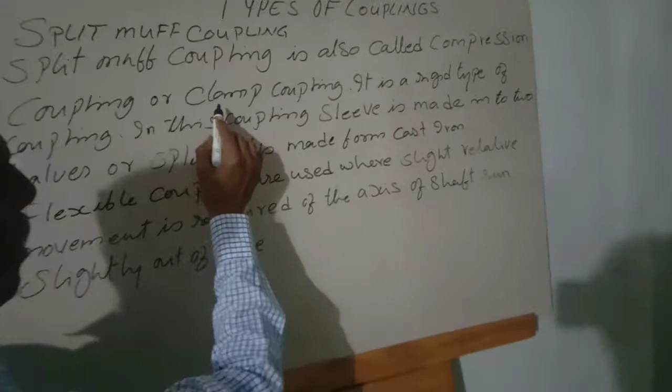Let's say in the first muff coupling or sleeve coupling. This muff coupling or sleeve coupling is made into two halves. Here, see, split muff coupling or sleeve coupling. Split muff couplings is also called compression coupling or clamp coupling. This split muff coupling is called sometimes compression coupling or clamp coupling also. It is a rigid type of coupling. See, as I say in the...

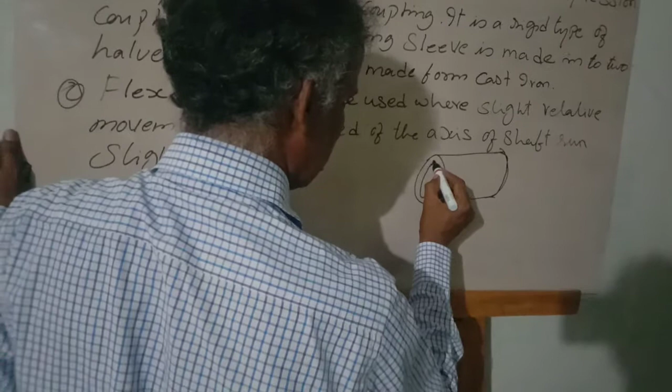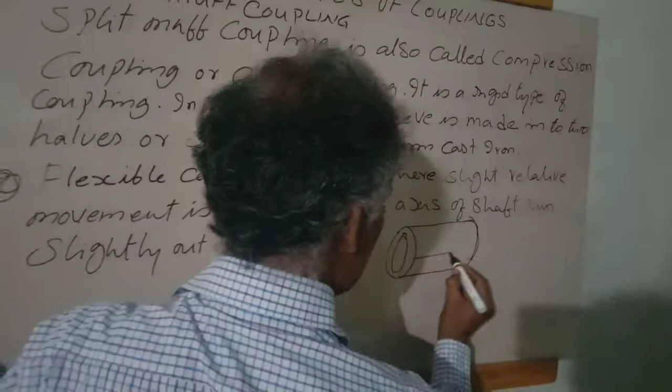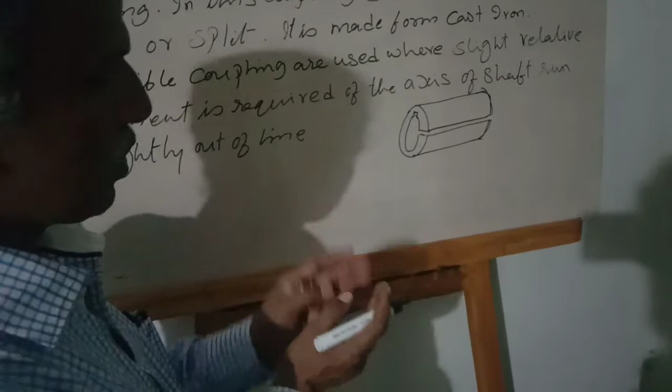This is a sleeve coupling. This sleeve coupling, sometimes they will split this one. They will cut. One side, they'll split it. So when you split this one, when you press it, it will have some flexibility, some cushioning action, like an elasticity form. Now,

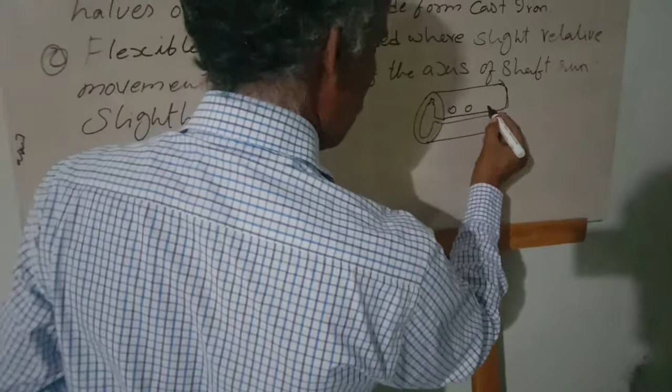Here they'll make holes to fix bolts. This is the one type of split coupling. The another one is

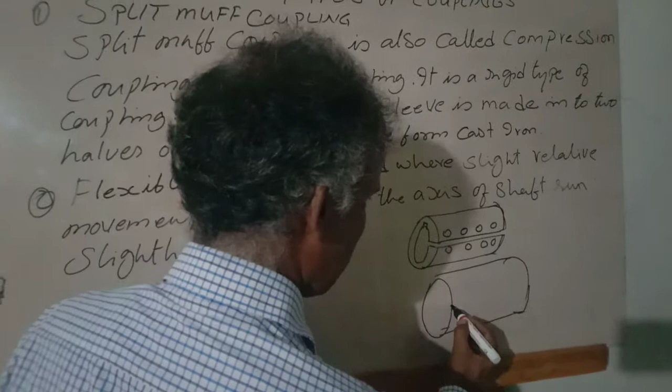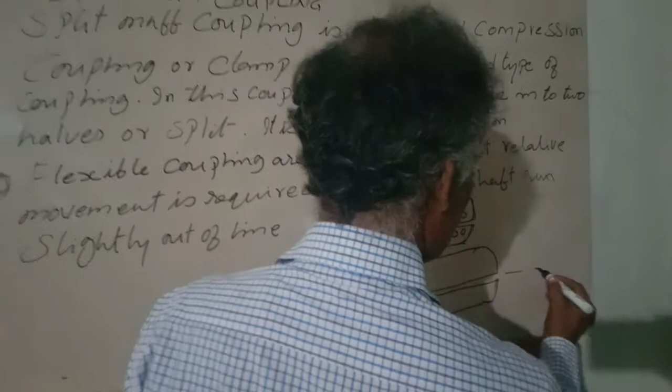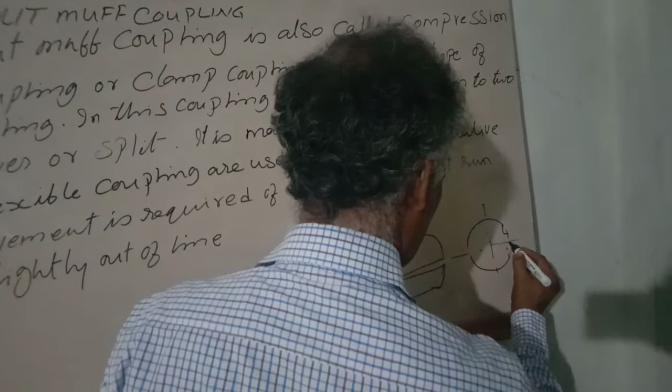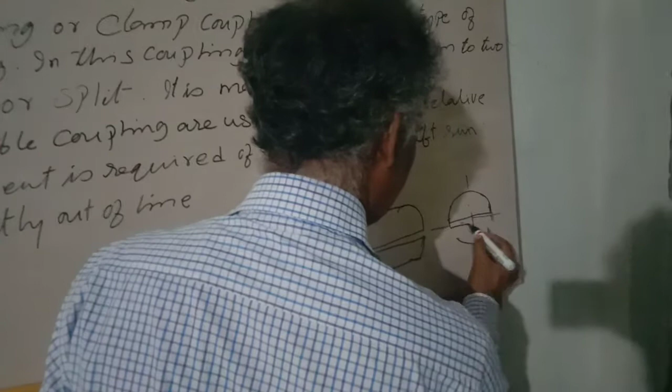Make completely two halves. They'll make into two halves. When you see from the axis of this, you can see like... or it will be same like two halves. Two halves. Two halves.

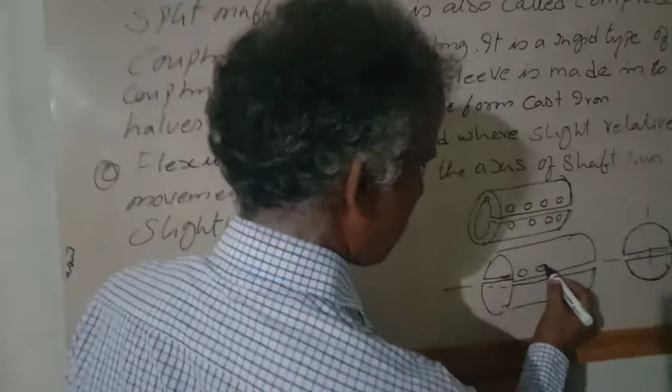Same way there will be fixed nut and bolts, either side of this sleeve, other side and this side.

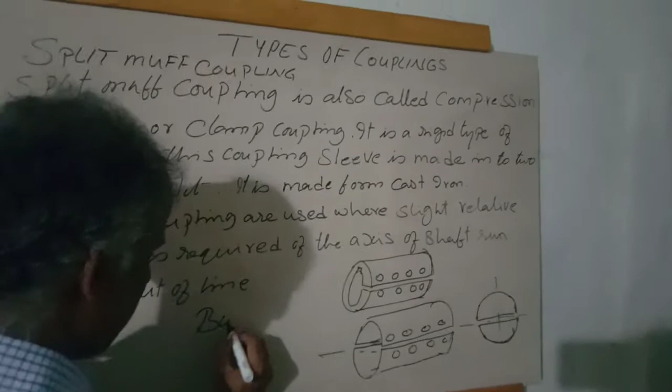Now, when they are using this split coupling, they'll make a joint of butt joint. First one, butt joint. Second one is lap joint.

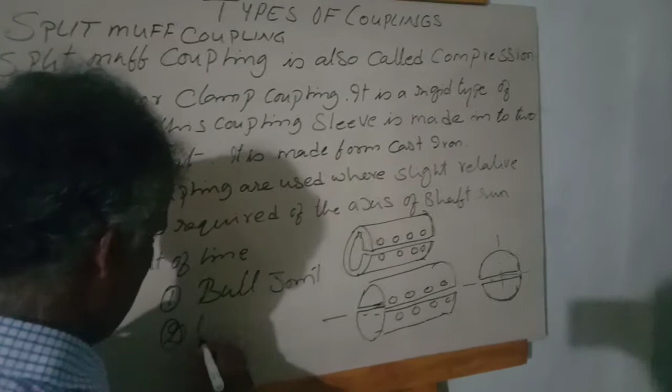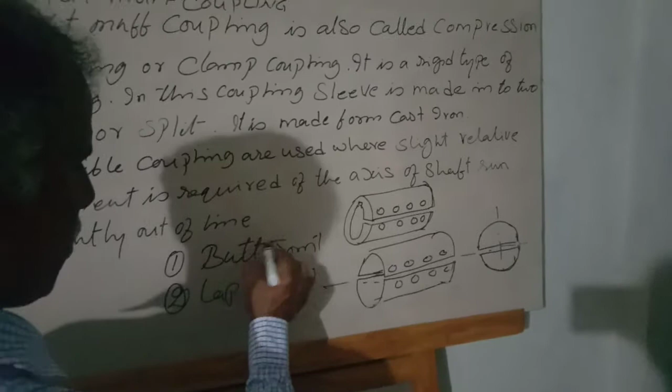When they use the butt joint, they'll insert the two shafts with the keyway in the same axis. Same line, the two keys are fixed.

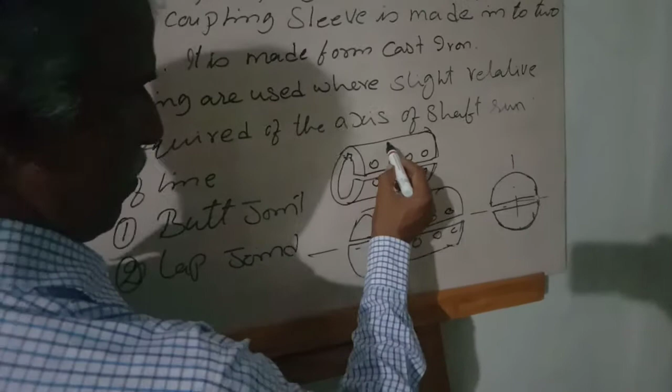If you are going to make a lap joint, at one side half of the length will be key. Another half, when these two shafts are inserted, one side here, opposite to that, other side that keyway will be fixed.

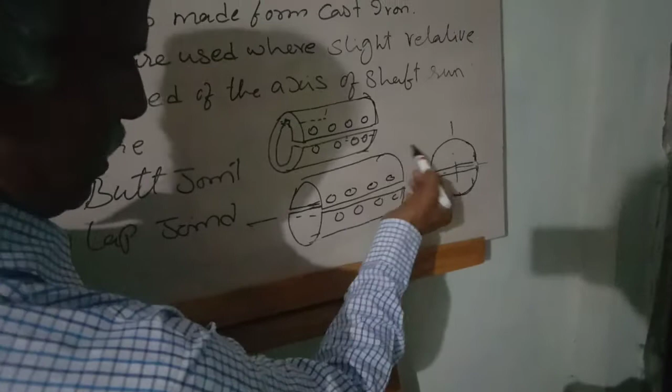This is a split compression type. That's why they call the split muff coupling is called compression coupling or clamping. With nut bolt, what are we doing? We are clamping the shaft.

This one is more rigid than the muff coupling. Muff coupling is a solid piece and with a keyway. This is with keyway and we are clamping the shaft, key, everything together. It is very rigid.

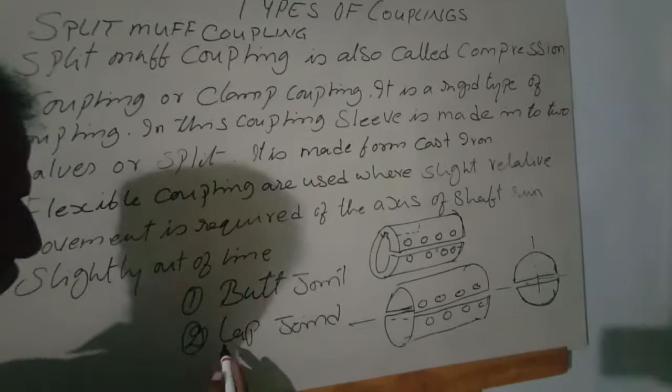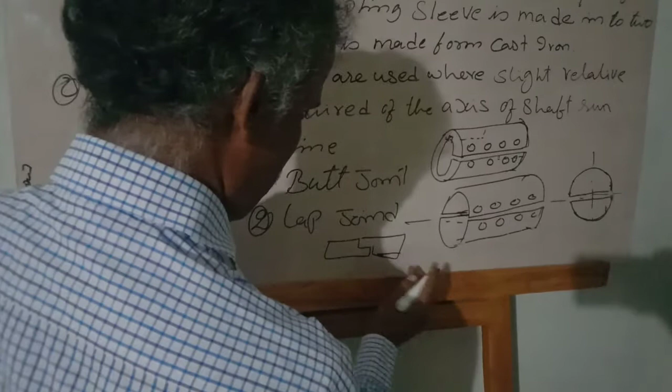It runs in the axis of the shaft. Now lap - I already told the lap. The shaft will be overlap like this.

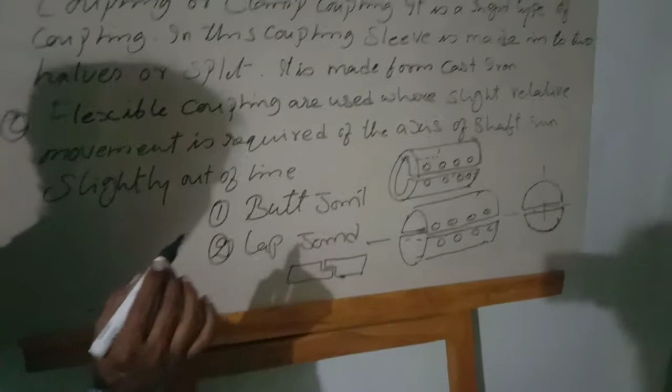In this lap joint, they have to use opposite side keyway. If it is a butt joint, the keyway will be the same. Now,

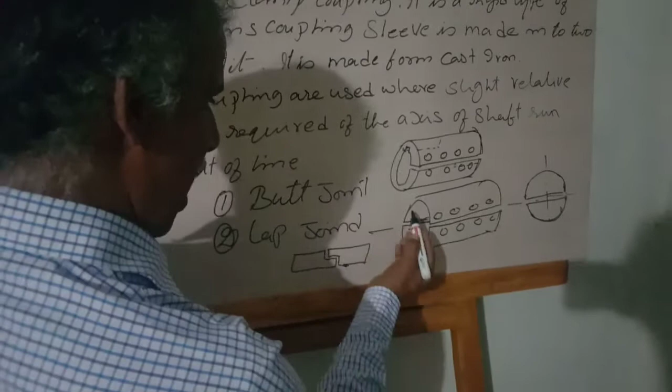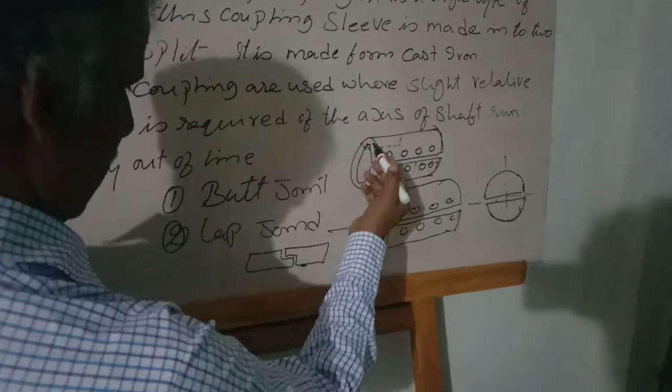In the 2-half split coupling, the butt joint also can have a keyway on the top. At the bottom also can have a keyway to hold the other shaft. Not like the split one, with the 2-half one keyway you can use here, one keyway for both butt joint and lap joint. For both lap joint and butt joint, we can use keys on opposite sides

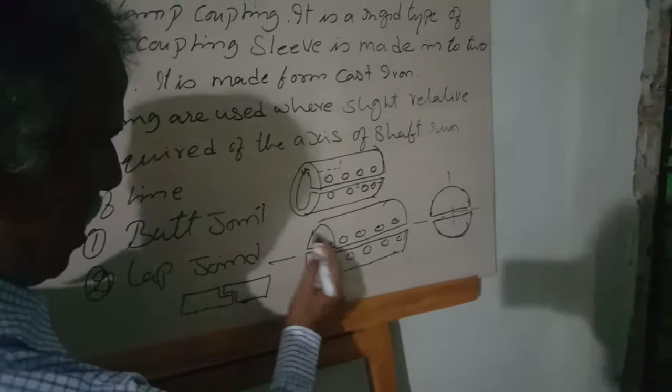And they'll clamp with nut and bolts. You have to see when you are making this, if it's a 2-half made with cast iron, it's okay. But whereas it is split at one end, it has to have little flexibility. If it is a very brittle metal, when you clamp it, it will break off.

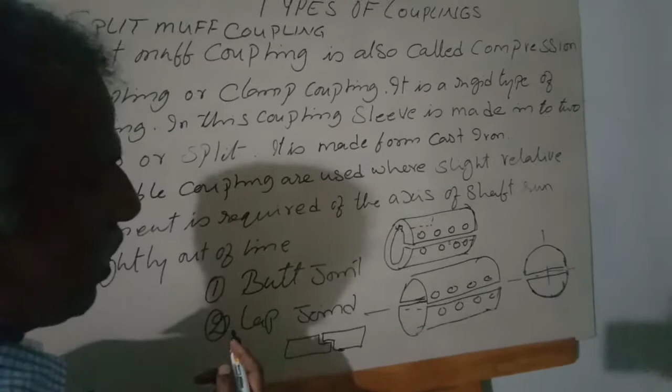So you have to keep that in mind when manufacturing it. If it is a 2-half split one, it's better making with cast iron. In cast iron also, sometimes we can make it flexible due to heat treatments, and we can use this compression type of coupling. So this split muff coupling is called compression coupling or clamp coupling.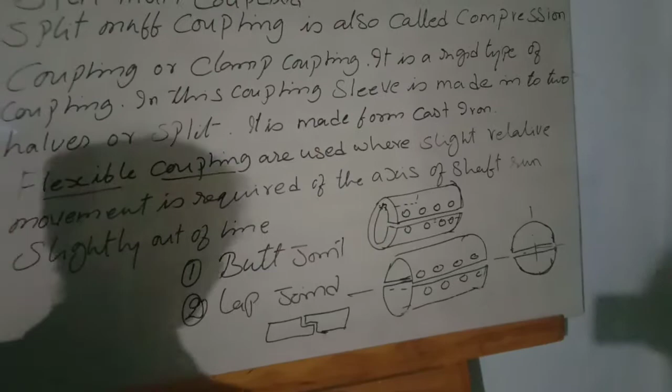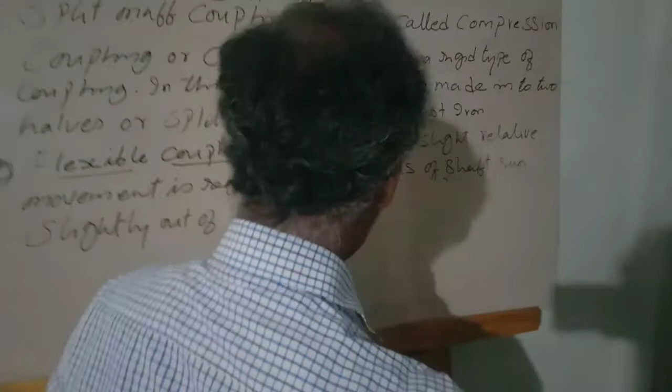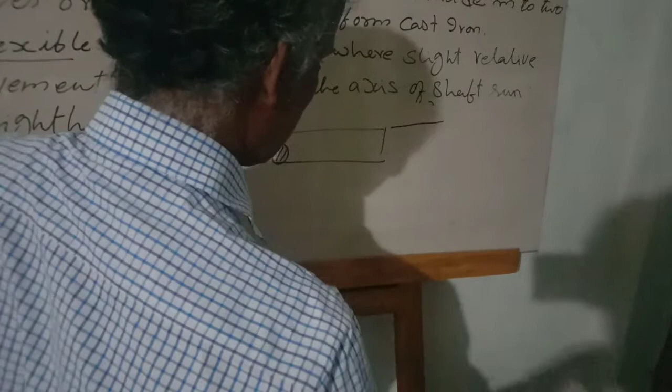Next, flexible couplings. This flexible coupling is used where slight relative movement is required. Slight relative movement is required. Example, this shaft is like this. And this shaft slightly, little bit different.

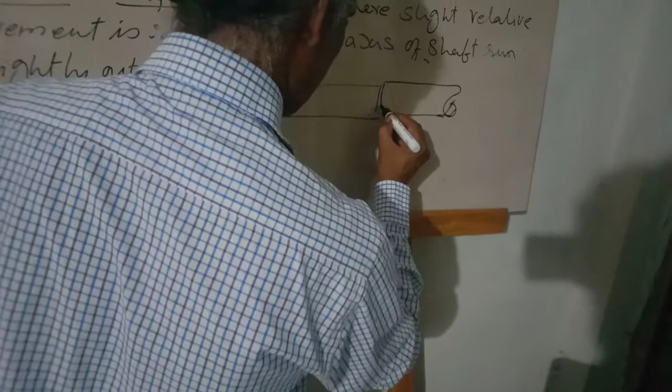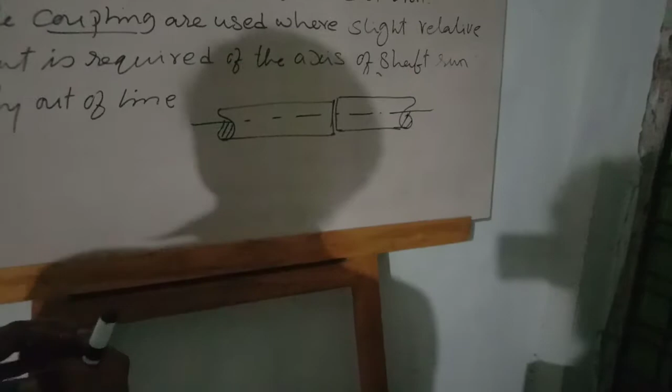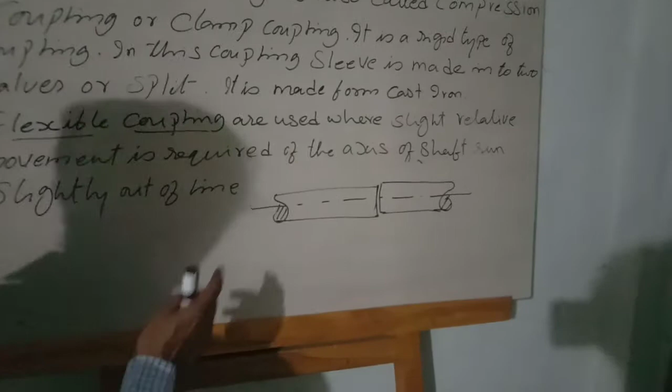Means, on the board I am showing very eccentric but very minute eccentric axis - it is not getting in line with the two shafts. The flexible couplings are used where slight relative movement is required of the axis of shaft. It runs slightly out of the line, right? So out of the line.

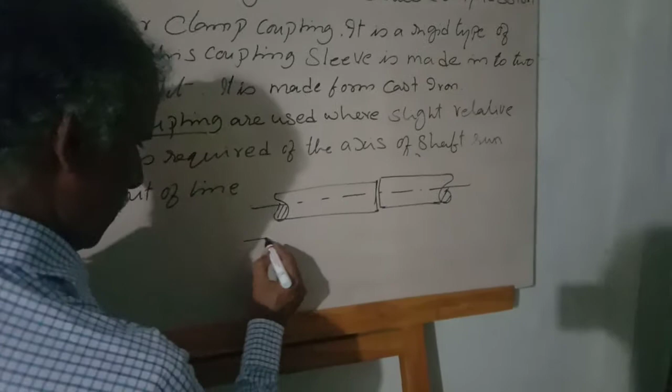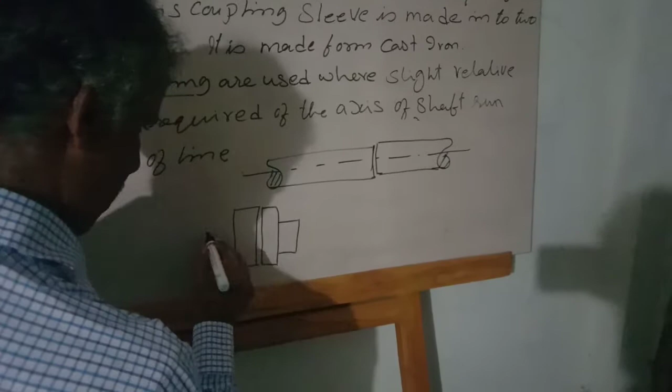For this, what they'll use? They'll use the flange coupling. Example, a flange coupling. Flange - means it's not a flange, this also will be in the shape of flange coupling. The hole. The other side nut bolt.

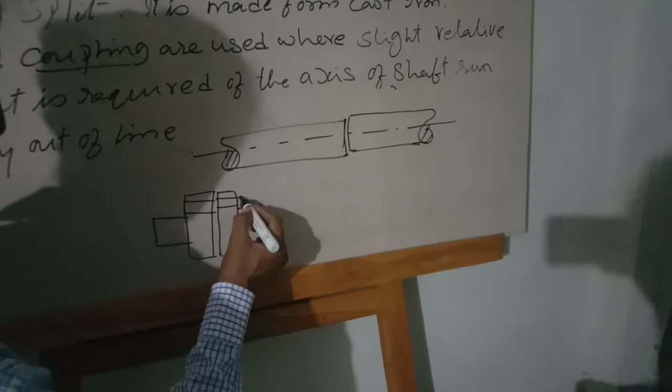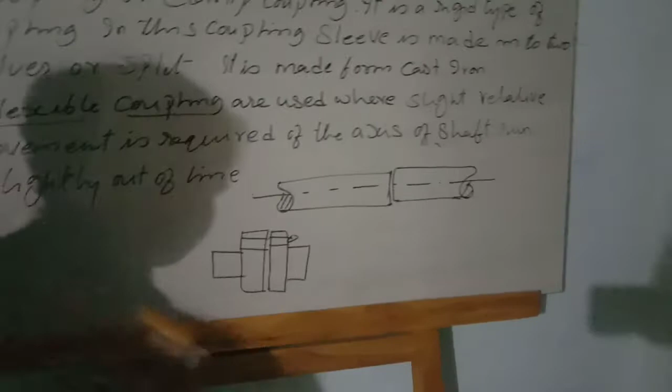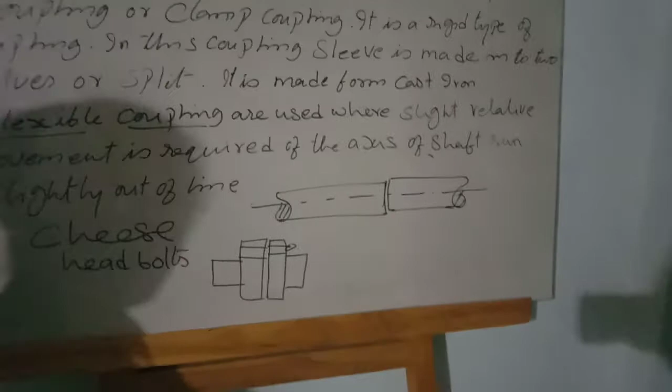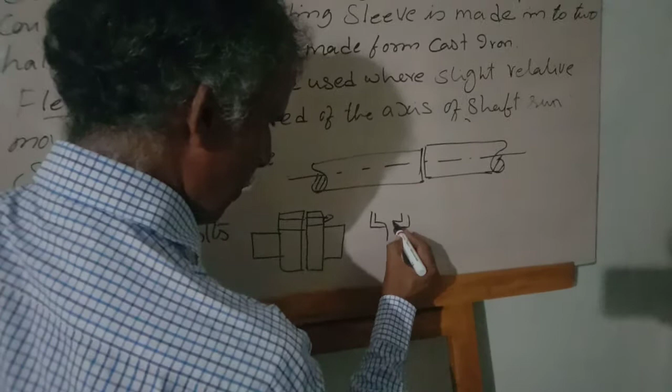This side. Here in this flexible coupling, cheese head bolts are used. When you insert the cheese bolt, they'll put a leather washer in between this.

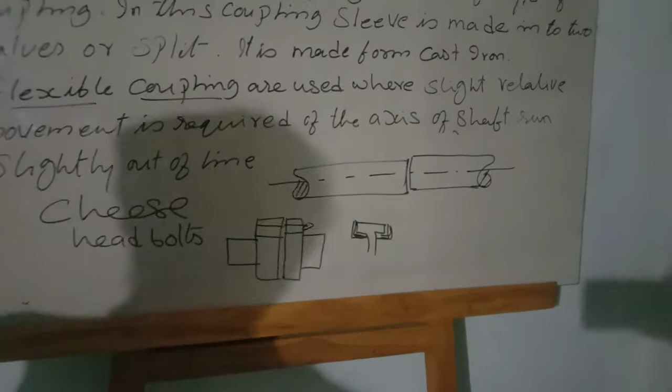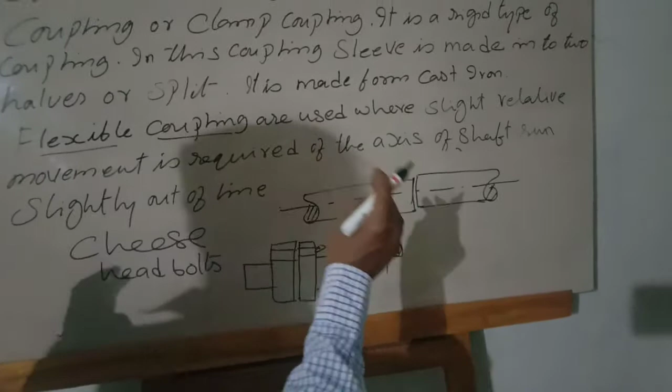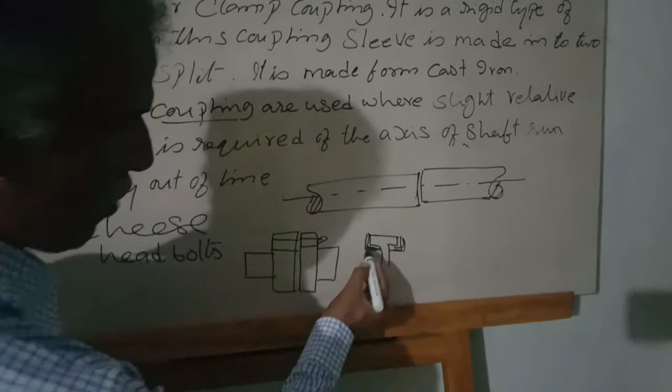What they'll put? Leather washer or synthetic material or rubber, and the other end of the flange is fixed with nut bolt. So the slight out of axis of this shaft, which is running slightly out of the line, automatically when it is running it comes into the center because of this flexible material what we are using here.

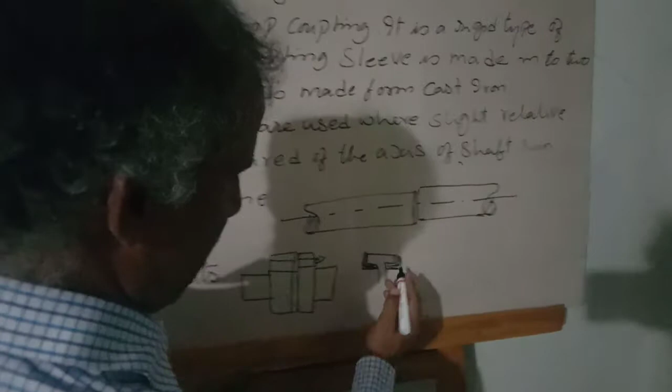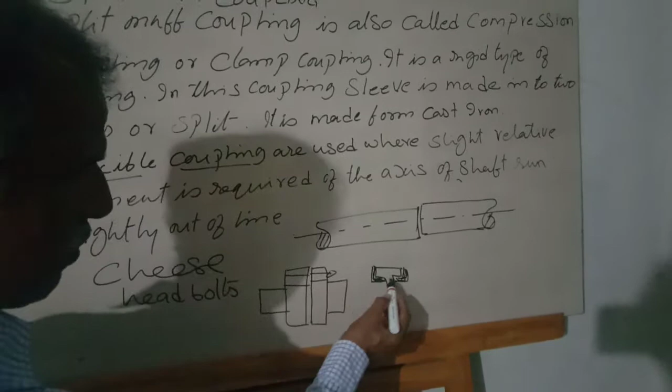Due to this one, automatically it will set into the line and it will push, the bolts will push to the side to make it center. That's why this is called flexible couplings, used where slight relative movement is required of the axis of the shaft. It runs slightly out of line. When it is running, we will use the flexible material to join the other end.

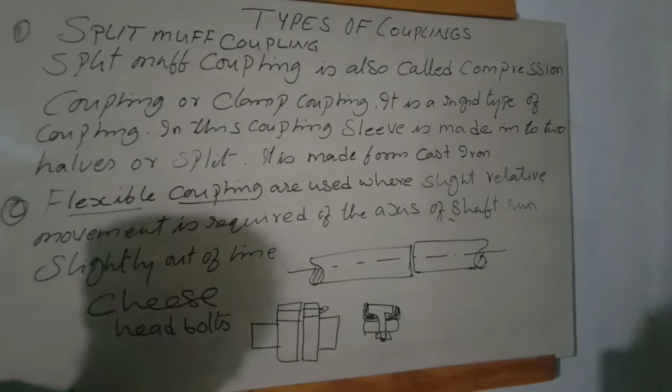So flexible type, and now pin type also is there. In the next class, we will learn about the pin type coupling, where instead of the bolt having a flexible material, we are using washers. Next time the different method we use and it will name the coupling a different name.